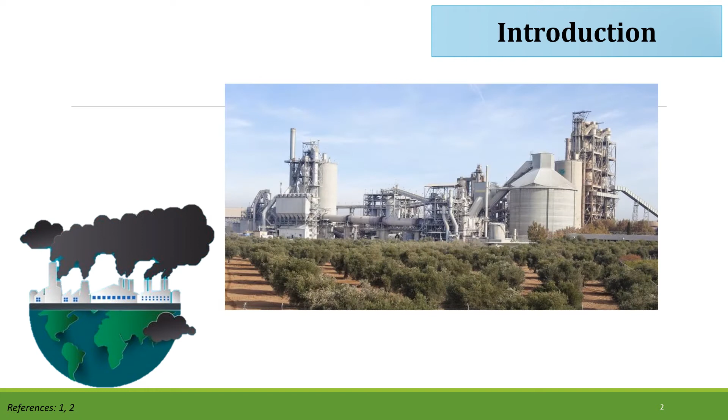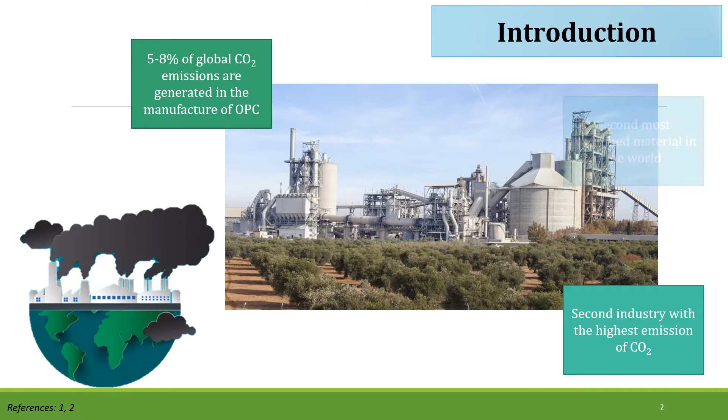Currently, reducing carbon dioxide emissions and solid waste are some of the global challenges. In this context, the cement industry is the second industry with the highest emission of carbon dioxide into the atmosphere, responsible for 5 to 8% of the emissions of this greenhouse gas, and is the second most consumed material in the world, only behind water. For its part, the glass industry annually produces around 130 million tons, of which only 27 million tons are recycled. So about 80% of the glass goes to landfills.

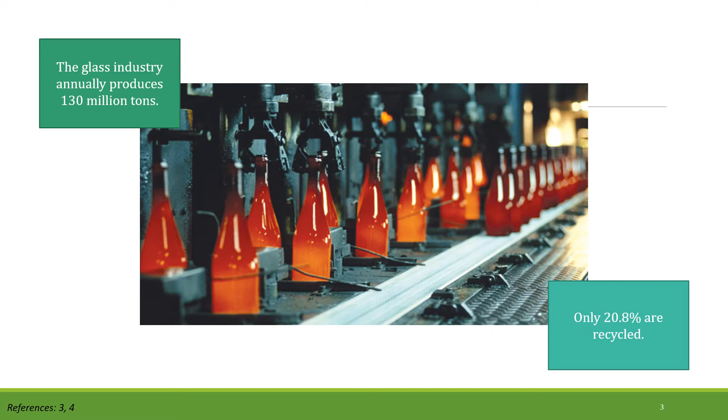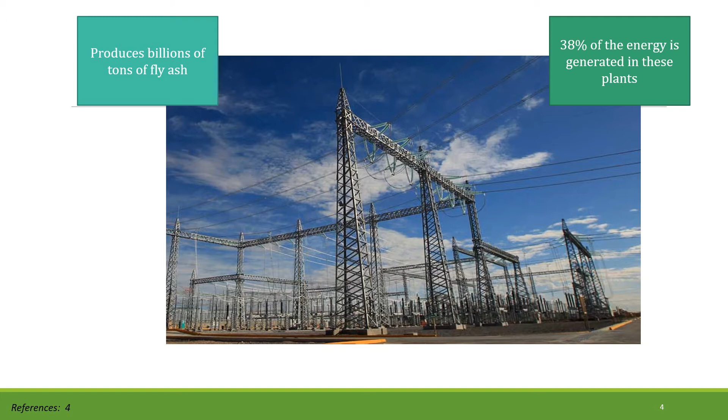Similarly, the generation of electrical energy from thermoelectric plants emits gases and other pollutants such as sulfur and nitrogen oxides, as well as particles and solid waste like fly ashes. Forecasts estimate an increase of 30% in the production of electrical energy from coal, and it is expected that this will be the case for at least the next 30 to 50 years.

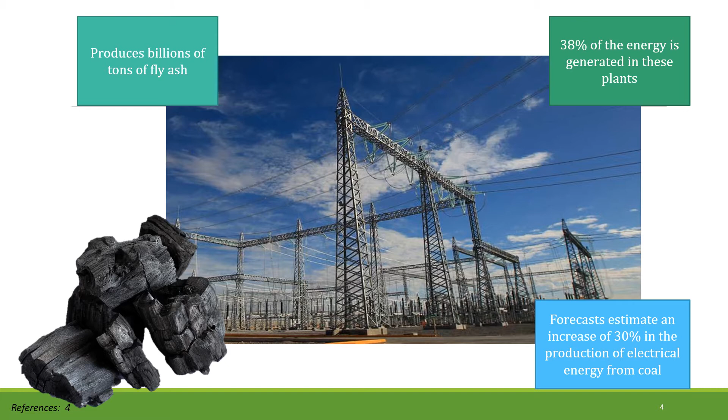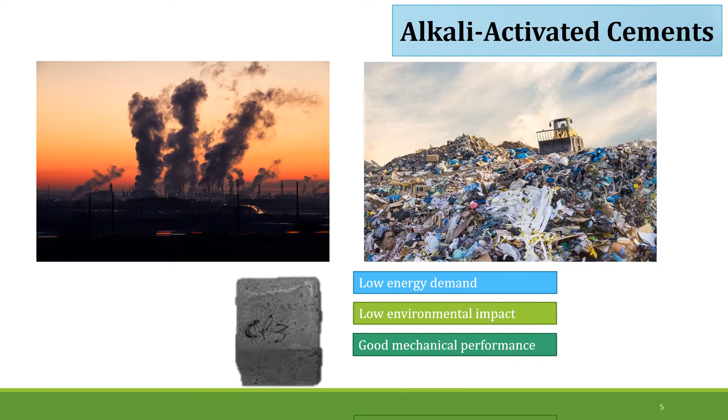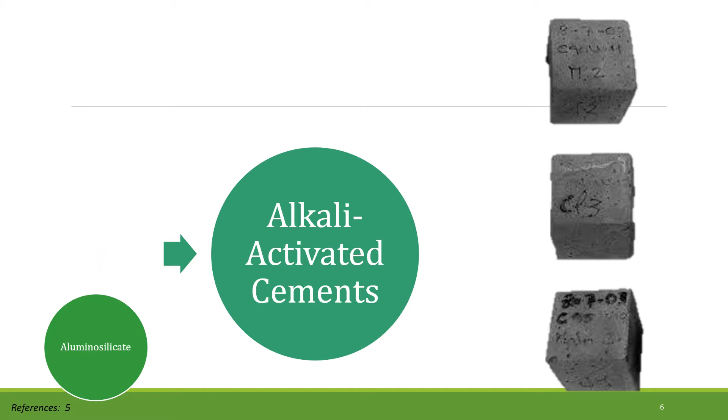In order to reduce pollutant and solid waste emissions, alkali-activated cements have been considered as a viable alternative due to their lower energy demand and environmental impact, with good mechanical performance and durability. These materials are obtained from the combination of an aluminosilicate such as metallurgical slag, fly ash, or silica fume, with an alkaline source called activator. The mixture of sodium hydroxide with sodium silicate is the most widely used activator.

However, its manufacture requires high temperatures, and approximately 1.95 kilograms of carbon dioxide are emitted per kilogram of hydroxide and 1.50 kilograms of carbon dioxide per kilogram of silicate. Therefore, the search for alternative activators with less environmental impact arises, so this work presents the reuse of industrial glass waste as a raw material in obtaining an alkaline activator.

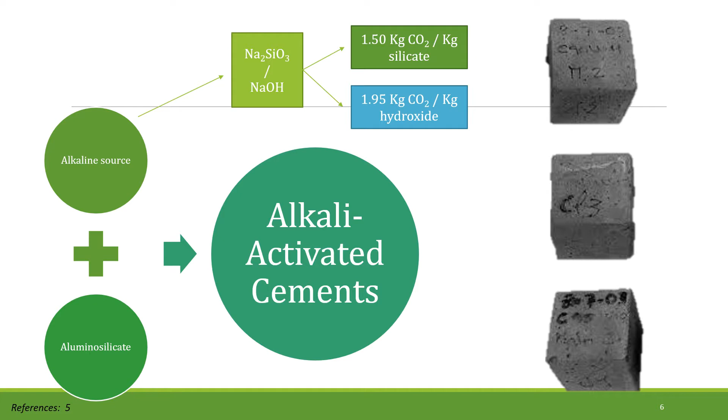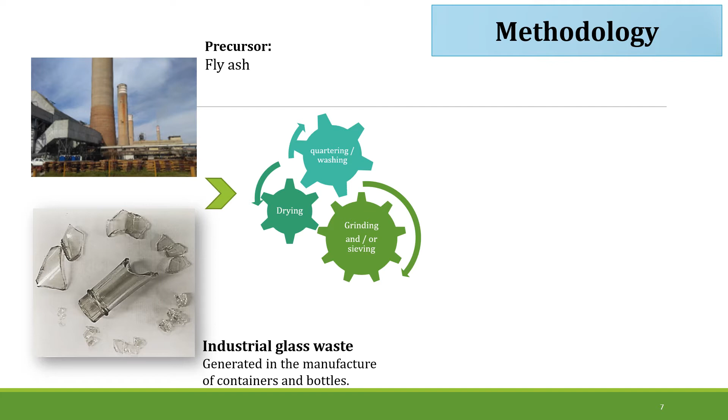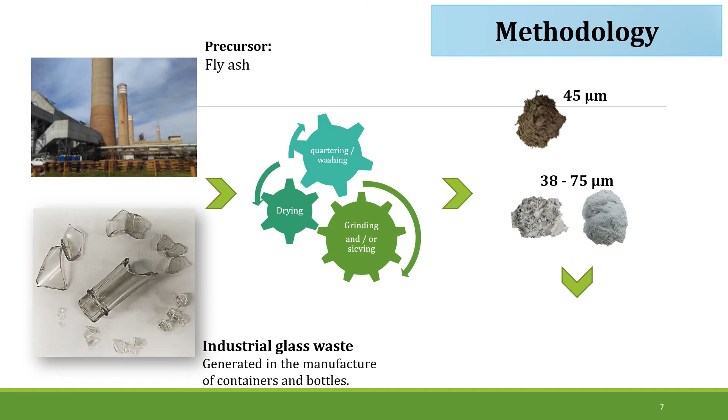The methodology used throughout this research can be divided into two stages. The first stage is obtaining and conditioning the raw material. In it, the fly ash was obtained from the Federal Electricity Commission thermoelectric plant, while the glass waste came from the Pavisa Group. The materials went through a process of washing, in the case of glass, and quartering, in the case of ashes. Later, both were dried, ground and sieved to obtain particle sizes of 45 microns in the fly ash and 38 and 75 microns in the glass residues. Finally, a physicochemical and microstructural characterization was carried out.

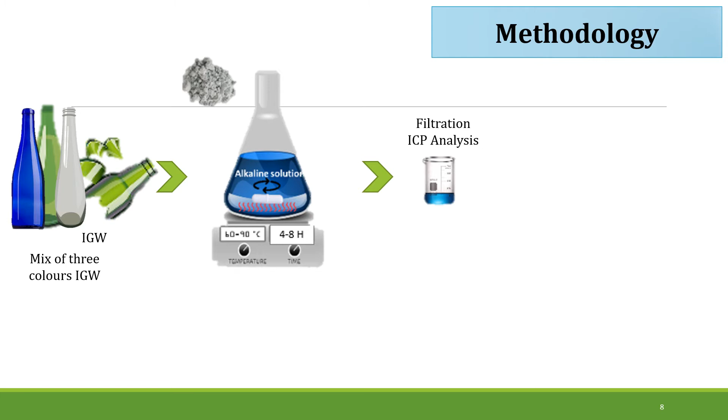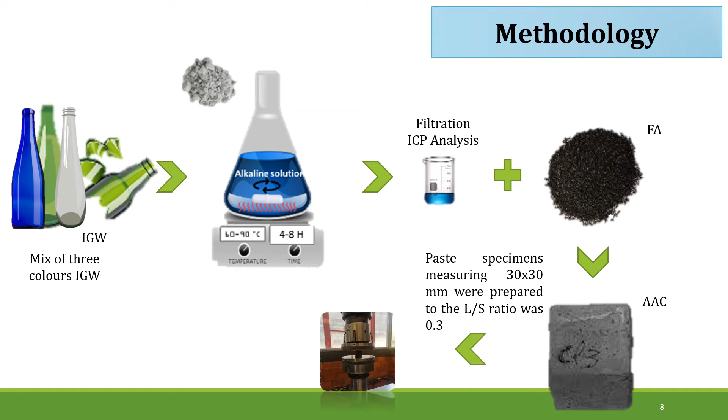In the second stage, a series of experiments are carried out with a reaction in which the glasses crushed at 38 and 75 microns are added to a 10 molar sodium hydroxide solution at different conditions ranging from 4 to 8 hours and from 60 to 90 degrees centigrade. Once the reaction is finished, the solution obtained is filtered and analyzed by ICP. Finally, with the solution that has obtained a greater amount of dissolved silicon, a mixture with fly ash is created to prepare a paste with a ratio of 0.3 and make an alkali-activated cement whose mechanical resistance will finally be measured by compression.

It was observed that the fly ashes have as main oxides silicon, aluminum and iron oxides, and to a lesser extent calcium and magnesium oxide. According to the specifications of the ASTM C618 standard, the fly ash corresponds to a type F ash. Chemical analysis by XRF shows that glasses are made up of silicon oxide, sodium oxide, and calcium oxide to a greater extent, and iron oxide to a lesser extent. This indicated that the glass waste is the sodium-calcium type, and that its high silicon content makes it viable to be used as a source of silicon.

X-ray diffraction analysis of the fly ashes confirmed the presence of amorphous material, identified in the diffractogram by the lifting of the baseline and the wide halo of 15 to 35 degrees of 2 theta. Likewise, the characteristic signals of quartz, mullite and magnetite were observed. The presence of amorphous material in a higher proportion is an indication of the reactivity of the fly ash, which is important for the activation of the fly ashes in an alkaline medium.

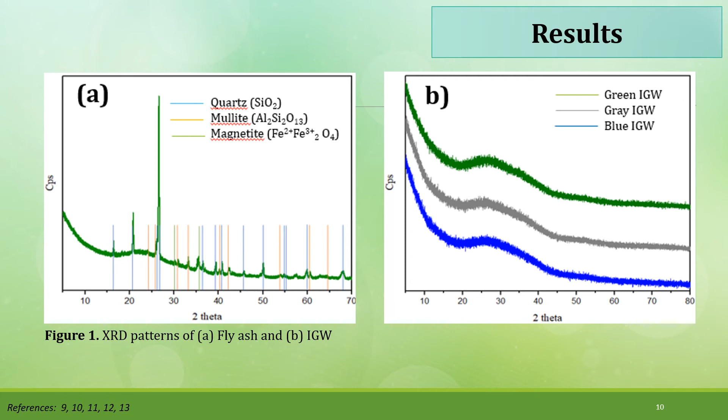For the glass, XRD analysis confirmed its amorphous character or low structural order, without the presence of crystalline material. The 20 to 40 degrees wide halo of 2 theta in the diffractogram is characteristic of its amorphous nature. Its position and maximum intensity are related to the calcium content present in the glass.

The FTIR spectrum of fly ashes exhibits two main broad and intense bands, characteristic of internal vibrations of silicon and aluminum tetrahedra. The characteristic bands of quartz, mullite and amorphous material overlap in the 1200 to 900 range, generating the broad and intense band in the FTIR spectrum of fly ashes. Gaussian deconvolution of the spectrum revealed 5 fundamental signals. The series of lower intensity bands located at 1109, 790 to 780 and 694 are characteristic of quartz, while mullite is responsible for the bands at 1173 and 560 to 550, associated with octahedral aluminum. The bands located at 984 and 928 were attributed to the amorphous phase.

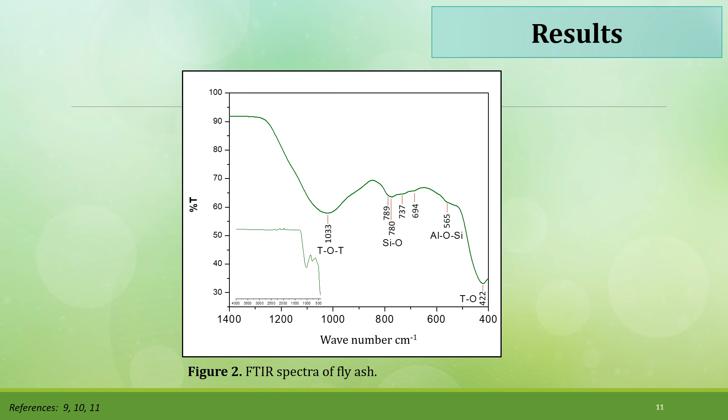Finally, with the activator with the highest ratio, an alkali-activated cement was manufactured and its mechanical resistance to compression was measured after 7 days of curing. This was compared with another alkali-activated cement manufactured from a mixture of hydroxide and silicate, and it was observed that materials with very similar strengths are obtained, the cement created from the alternative solution being slightly higher.

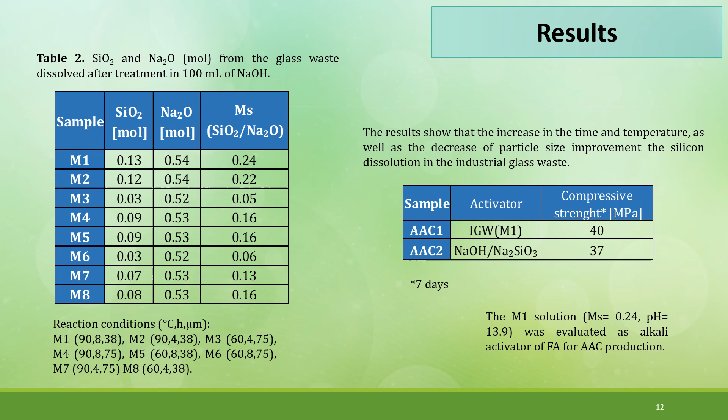The results showed that silicon from glass waste dissolved in sodium hydroxide solution can induce the same effects as the silicon in water glass, so it can be used as an activator. The best conditions of solubility of industrial glass waste were a treatment at 90 degrees Celsius, a reaction time of 8 hours, and a particle size of 38 microns. The behavior of the alkali-activated cement pastes in terms of compressive strength was comparable to the performance observed in pastes prepared with a conventional activator.